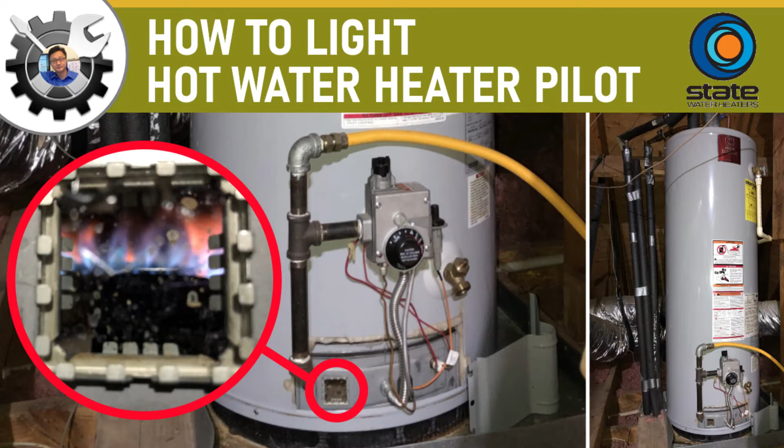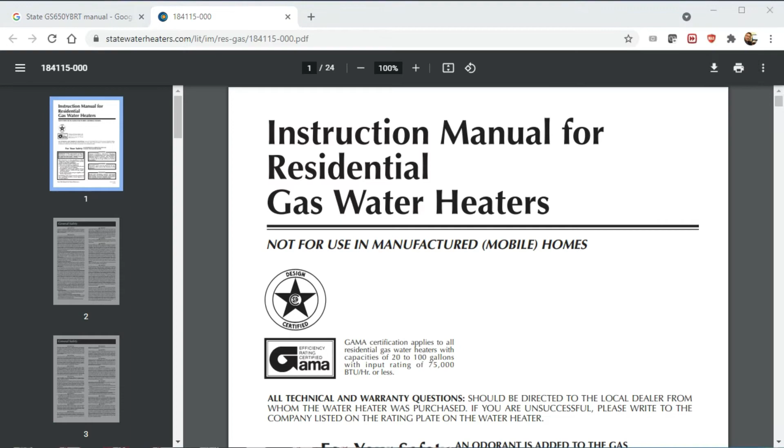Hey guys, relighting a pilot is not very difficult, but since flammable gas is involved, please read the safety warnings of your model first. You can easily Google the model number of your hot water heater to find it. I also had to Google and I found the instructions for my model.

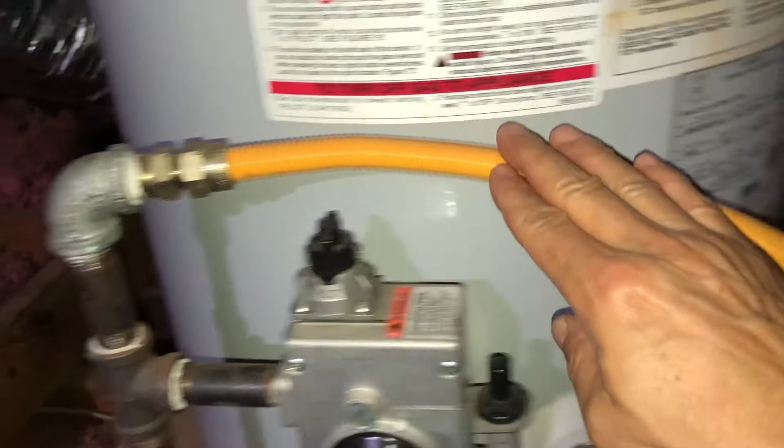My pilot light is out, so let's turn off the gas and investigate what's happening. To do that, follow the gas line and look for the shut-off valve like this. When the valve is parallel to the gas line, then it's in on position. When the valve is perpendicular to the gas line, like right now, then it's in off position.

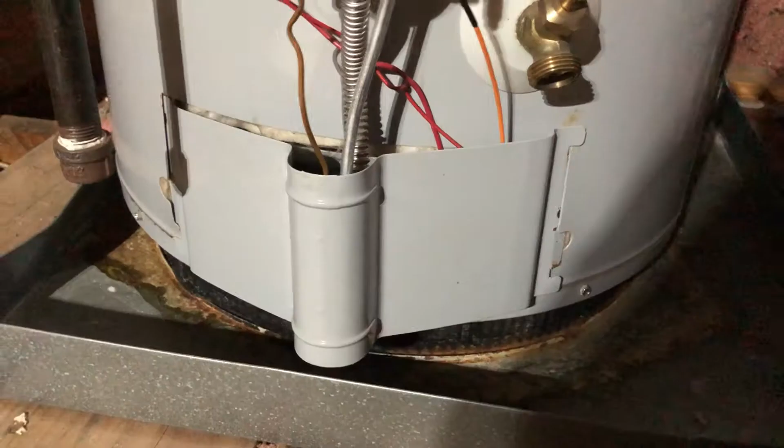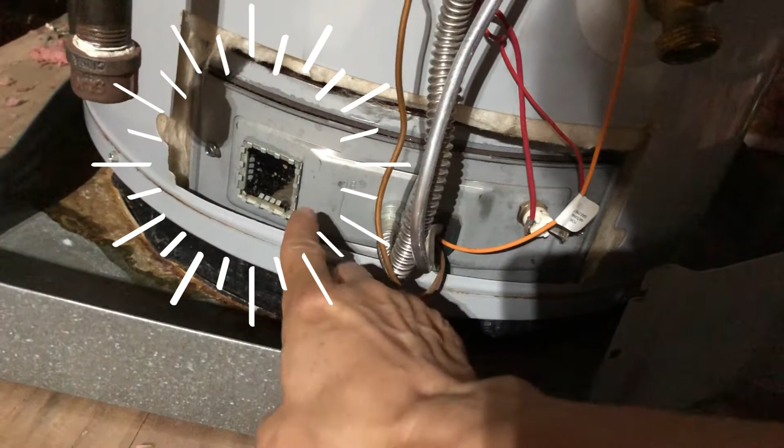I already know the pilot light is out since we have no hot water, but let's look at how we can check that. To do that, remove the front cover and look through the small viewport. For this model, you'll have to look slightly to the left and up through the viewport to be able to see the pilot light. If the pilot light is on, then you should be able to see the small blue flame.

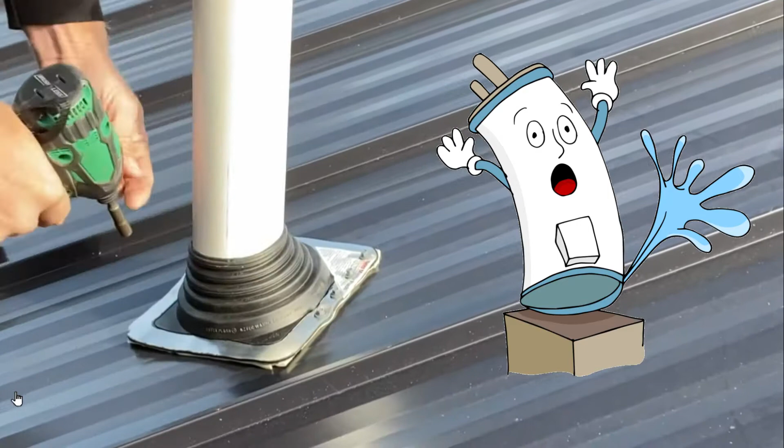Under normal condition, the pilot shouldn't go out. So let's investigate the possible cause before relighting the pilot. In the past, my pilot went out on a strong wind or heavy rainy day, but we didn't have that condition yesterday. Also, I don't see any water in the drain pan. I don't smell any gas. And the roof vent leak was fixed about 2-3 years ago, and the pilot stayed on for that long period.

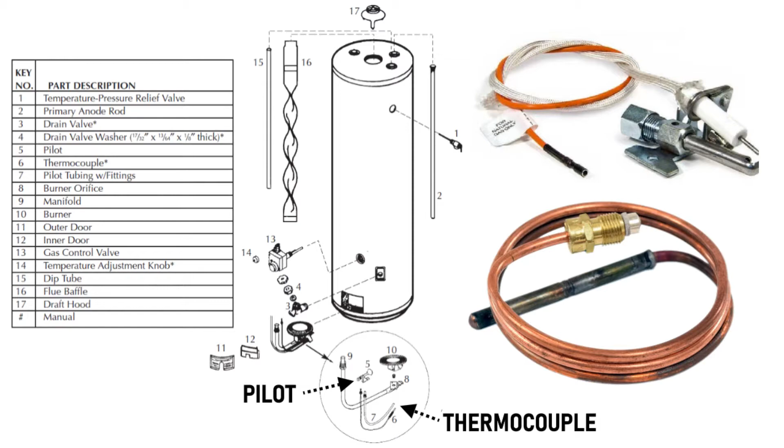My unit is about 7 years old, so it could be the pilot tube holes getting clogged, or the thermocouple could be going bad. So in the near future, I will clean the intake screen and check the pilot tube and thermocouple more closely. But for now, let's relight the pilot.

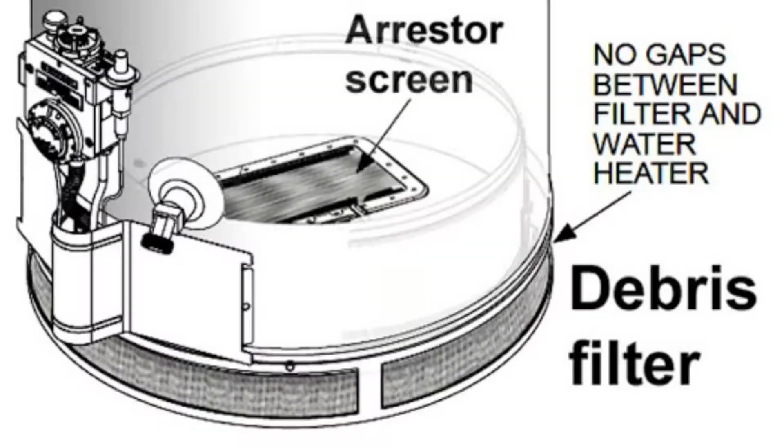Hey guys, so I have this State Select hot water heater. What's happening is the pilot light is going out right now. My wife is complaining there's no hot water. So let's look at the instructions. First thing we gotta do is set the thermostat to the lowest setting for the pilot lighting.

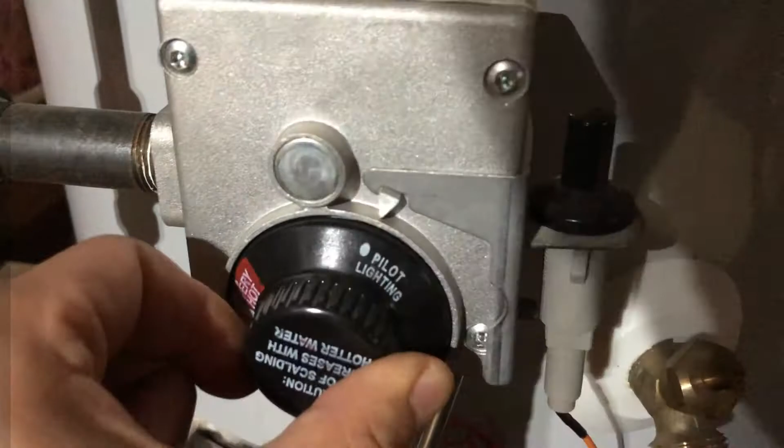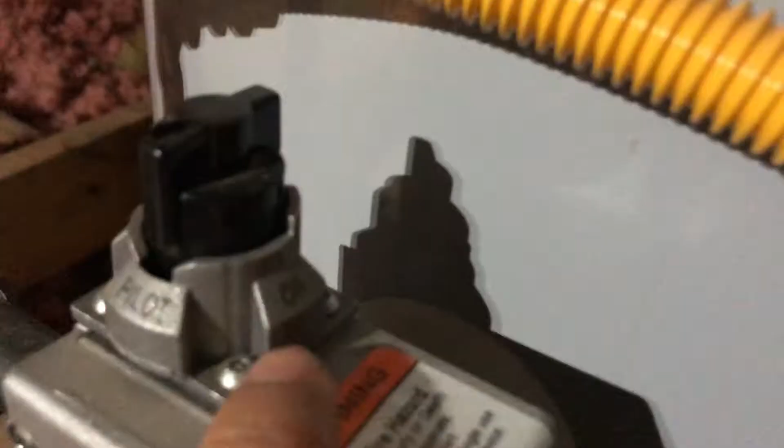Next, push the gas control knob down slightly and turn clockwise to off. So this one, push slightly down and you see here's off, on, and that's the off. Remove the outer burner door. Okay, we just did that. Wait 10 minutes to clear out any gas.

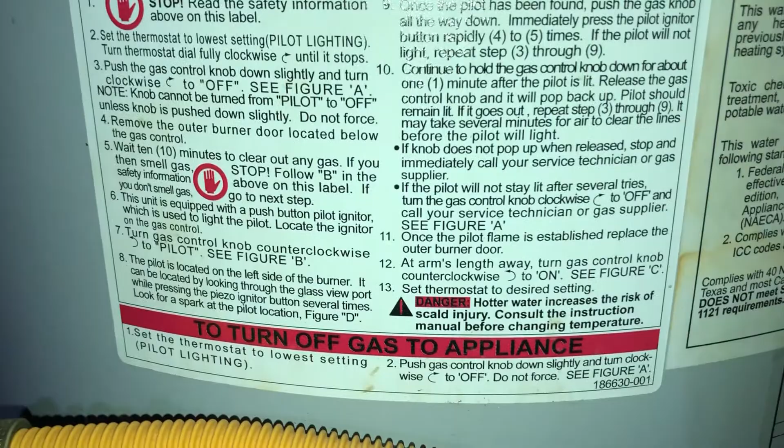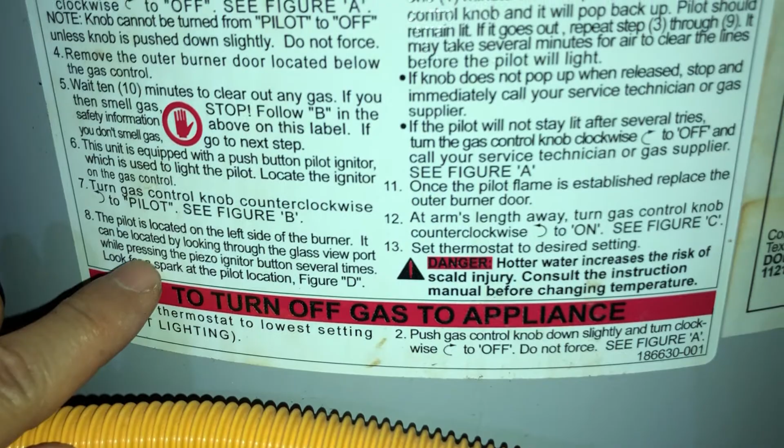Now we have to turn the gas control to the pilot position. Here's the pilot position. So I'm gonna turn this. Pilot is located on the left side of the burner. It can be located by looking through the glass viewport while pressing the ignition button several times. So when we're ready, we're gonna be pushing this several times real quick, and the pilot light, you should be able to see it here.

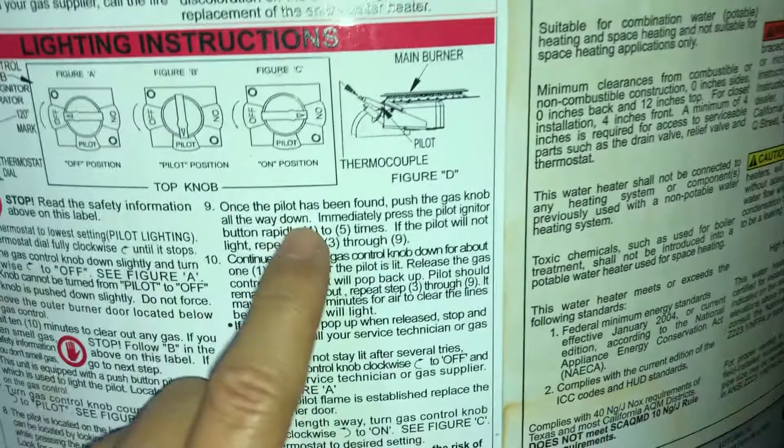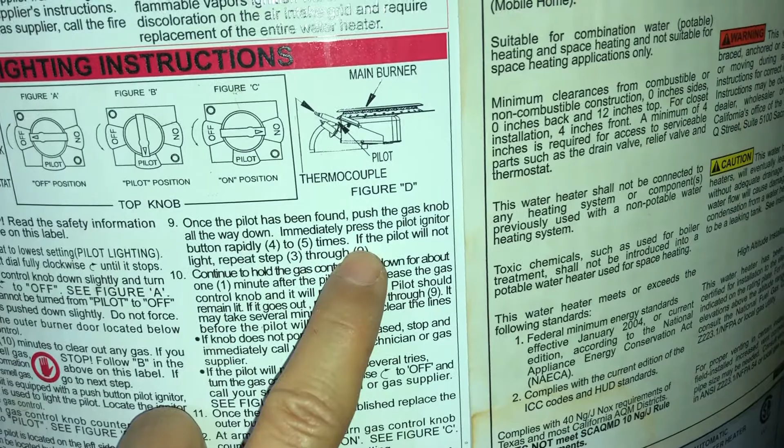If you look directly, you won't see it. You have to look that way, okay? Look to the left side of the water heater and kind of up. So it's left and up. Once the pilot light has been found, push the gas knob all the way down and then immediately press the pilot igniter button 4 or 5 times rapidly. If the pilot does not light, repeat steps 3 through 9.

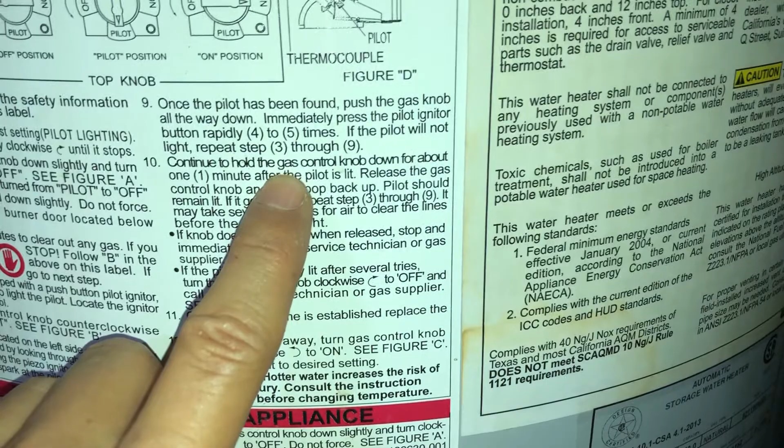Now let's continue reading here because it's kind of connected. Continue to hold the gas control knob for about 1 minute after pilot is lit. So when we're ready, we're gonna push this down, hold it down while clicking on this thing 4 or 5 times real quick, while looking in this hole here to see that pilot light lights up. And once it does, we're gonna continue to hold it down for a minute.

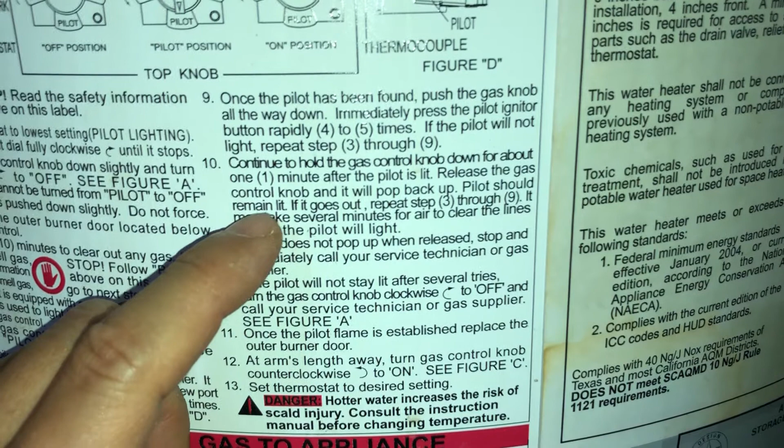And then we're gonna release it, let it pop back up, and we need to also check to see the pilot light is still on. In the past, I've had the pilot light go out as soon as I let this up. So you have to go back down here and make sure the pilot light is still on. If this knob doesn't come back up, it's a problem. So you gotta turn off the gas and call the service tech.

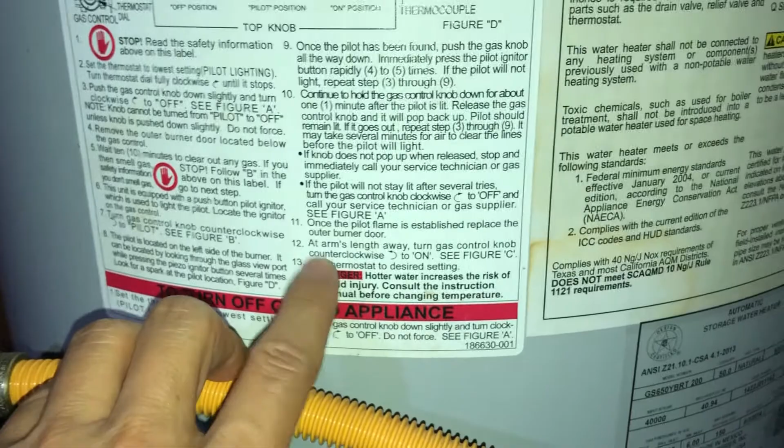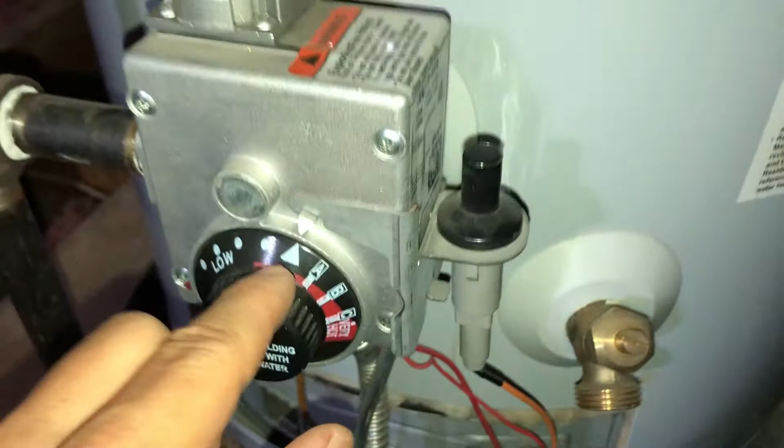Once the pilot flame is established, it says at arm's length, so I guess you gotta stay away, and then push down and turn it to the on position. Because I think initially you'll probably see the gas come out. And then set the thermostat here to the desired setting, like right there. We've been just keeping it right there. So, all right, let's do this.

Okay, so I waited about 10 minutes. This is set to pilot here. I'm gonna turn on the gas valve here. Now I have to do this in a weird posture here. So I'm gonna hold this down and push this down. Okay, I see the pilot light now. I'm gonna hold it down for a minute.

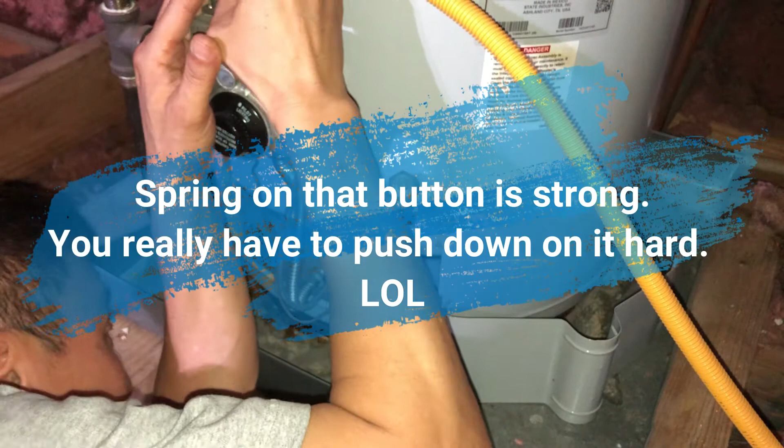Let it heat up. Oh my gosh, this button is hard to hold down. Okay, so it's been about a minute. I'm gonna let it go. I see the pilot light has actually gotten bigger and stronger than initially. I'm gonna let it go, and the pilot light is still lit.

Let me see if I can get a video of that. I don't know if I can catch it, but let me see. There, you can see the light, right? That blue light.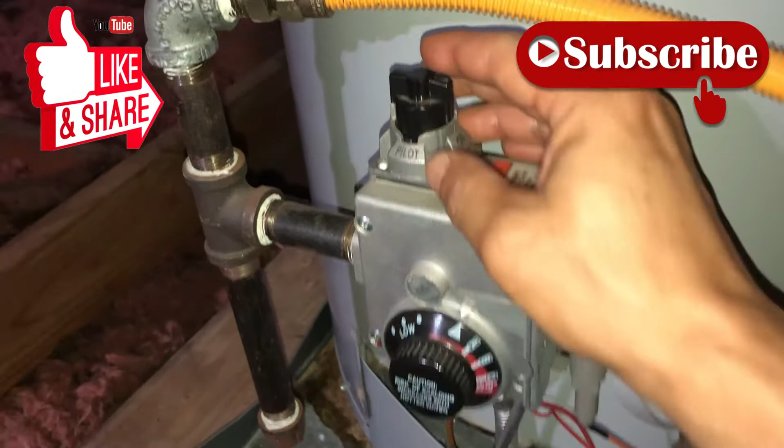Apparently, I didn't record the part where I was turning on the water heater. So what you want to do is, after the pilot is lit, put this front cover back on, and then come over here and turn this to the on position. After that, you want to set your water temperature. Now when you turn this to the on position, you're probably gonna hear a swoosh, big flame coming on.

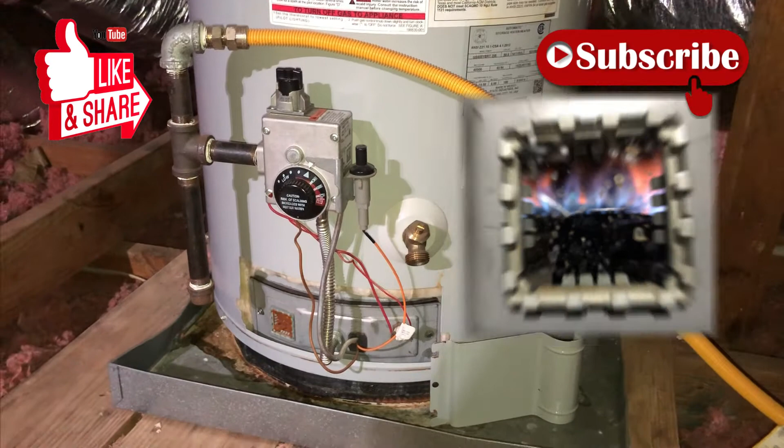I took off the front cover so that you can see the big flames that had started. Initially, it was a lot of red color flames, but later it settled into more blue color flames. As you can see, if you follow the instructions, it's something you can do easily, instead of paying 50 to 100 bucks for a plumber to do 5 to 10 minutes of quick work, or even having to wait for them to come out.